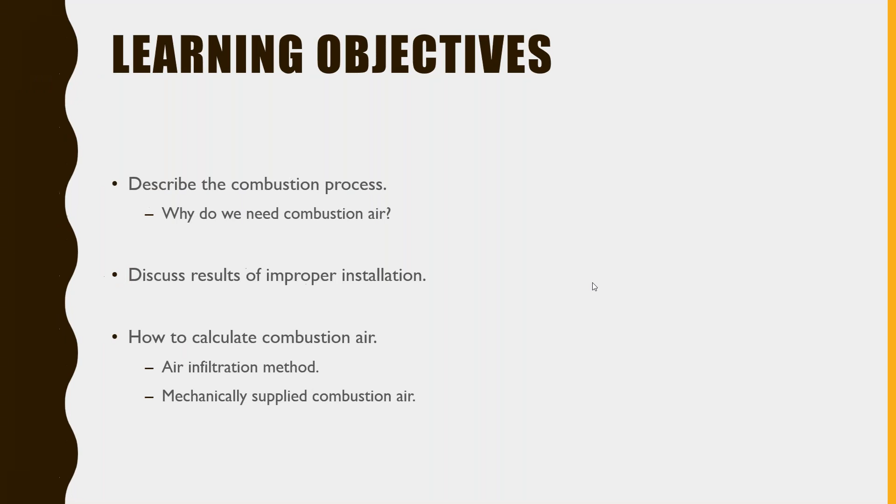Here's our learning objectives. We're going to describe the combustion process and why we need combustion air. We're also going to talk about what happens if we install equipment improperly without considering combustion air. Then we're going to talk about 2 methods to calculate combustion air: the air infiltration method, and how to mechanically supply combustion air.

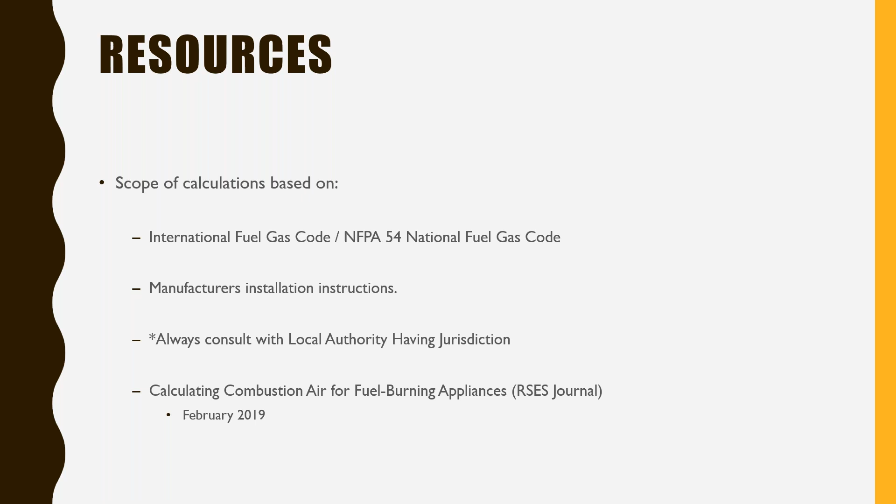This presentation is based largely on the International Fuel Gas Code. It's a code reference and standard that is adopted in many states in the U.S. and Canada. It's co-sponsored with the National Fire Protection Association's NFPA 54, which is the same book, just co-sponsored. So the bulk of our calculations are based on those code references. Also, some takeaways are actually in manufacturer's installation instructions. We have to put out the blanket statement that you always want to consult your local authority having jurisdiction, as they may have stricter requirements for your particular neck of the woods. If you're looking for more information, we did write an RSES article back in February 2019 with the same title, and I believe you have access to that as an archive.

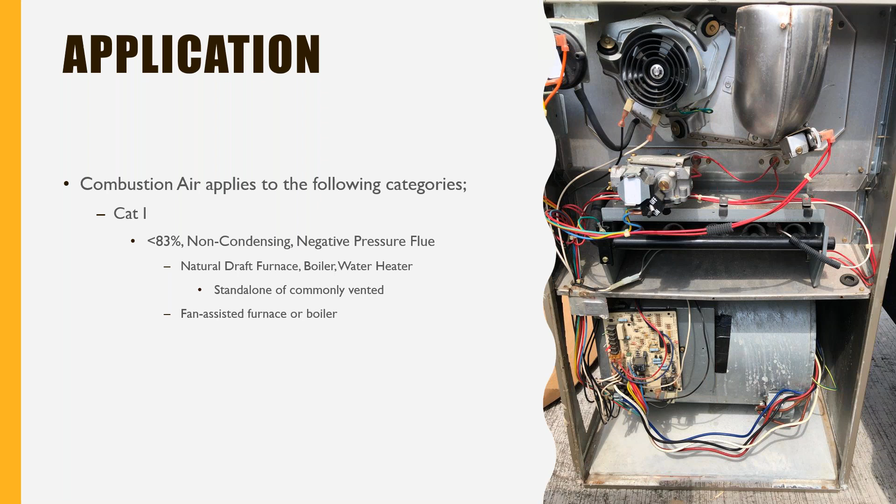As we get going, we need to talk about our application - when we're talking about combustion air, what scenario or equipment will we be applying it to? For starters, we'll talk about the different categories. For category 1, we're looking at something that's going to have an efficiency of 83% or below. It's not going to condense, and it will have a negative flue pressure. Generally these pieces of equipment are induced draft furnaces and boilers, or natural draft, and they can be standalone or commonly vented.

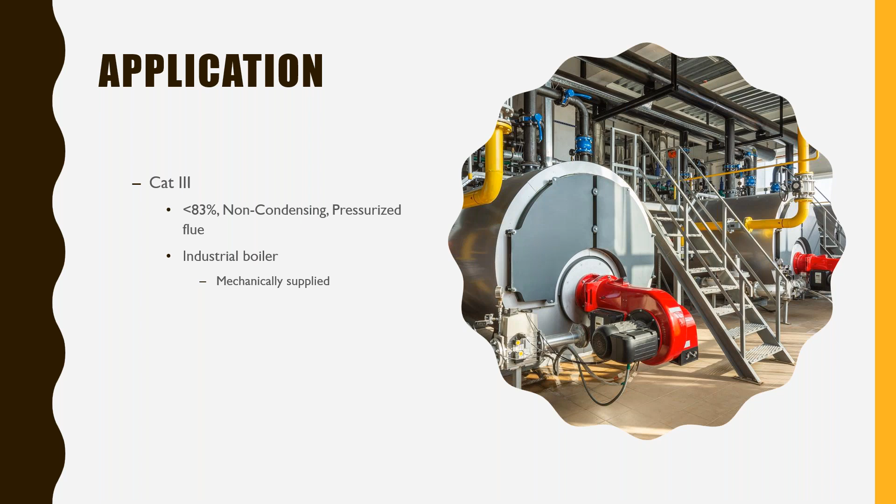Additionally, when we talk about combustion air, we talk about category 3 appliances. These are larger industrial boilers, typically 83% or below. They have a non-condensing exhaust flue piping, but the flue is actually pressurized. This will be primarily large industrial boilers you may see in a hospital or a large facility. So that's category 3.

And then category 4 - you may be thinking, well, wait, category 4 shouldn't apply to this. It can. Category 4 is above 87%, it's condensing, and the flue pipe is pressurized. However, it only becomes a consideration if the installing contractor was to use a single pipe, where they'll get combustion air from the space and just use another pipe for the exhaust gases.

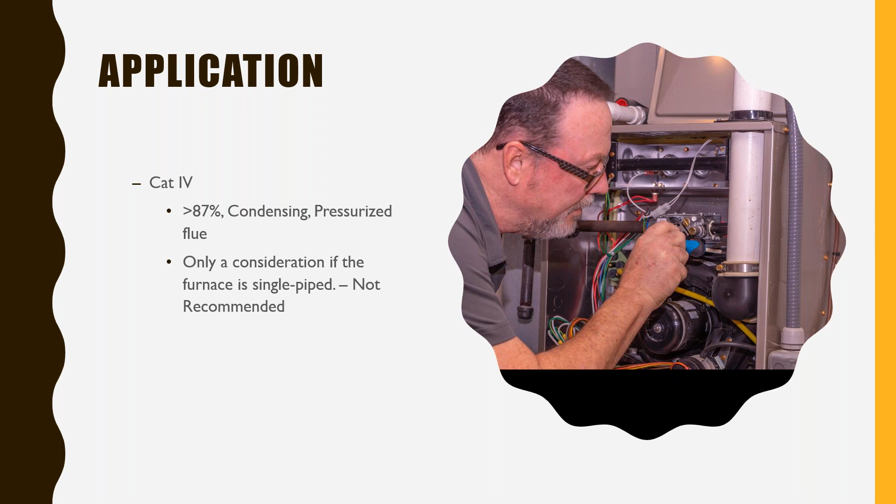This arrangement is not recommended because if you do, you have to account for combustion air, which we'll talk about here in a minute. All right, so let's do a quick review.

What do we need for combustion? We need air, we need fuel, and we need a source of ignition. Put those together, we get a fire.

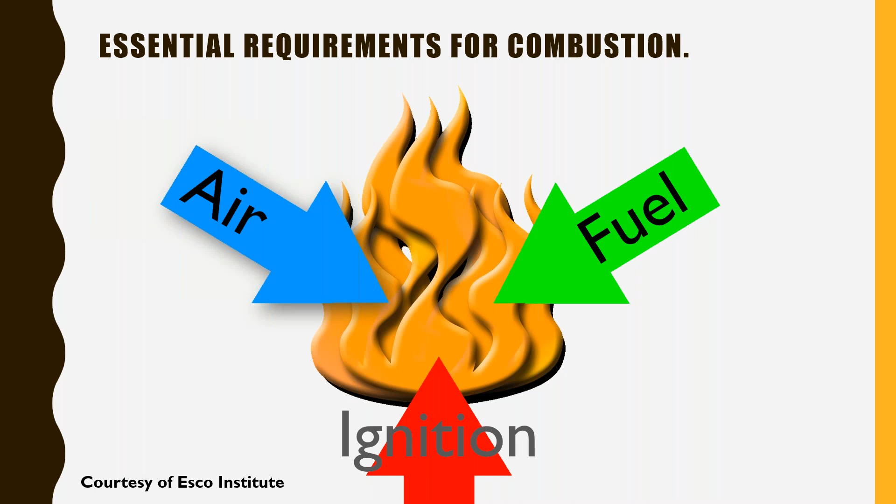Now, when we're talking about air, we're actually specifically looking at the oxygen content that is inside the air. Roughly around 21% of the air in the atmosphere is oxygen. So when we say air, we really mean oxygen. We can't get the oxygen to the burner without air. So when we say air, we're actually referring to the oxygen for combustion.

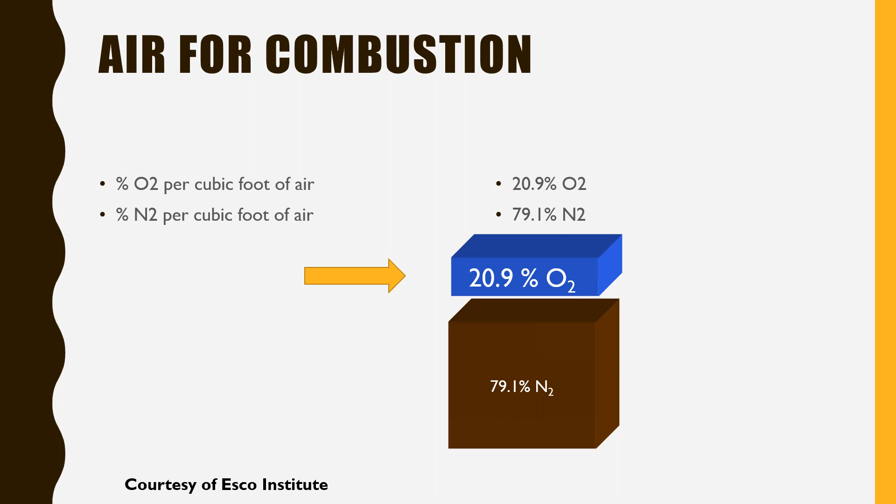Now, I'm going to be referring to a term, and I want to get it established as we move on in our presentation. That term is called a combustion appliance zone. We're going to use that to describe a space - where do my appliances actually live? It's a physical location. Other people may refer to it as a furnace room or mechanical room, but we're going to call it a combustion appliance zone.

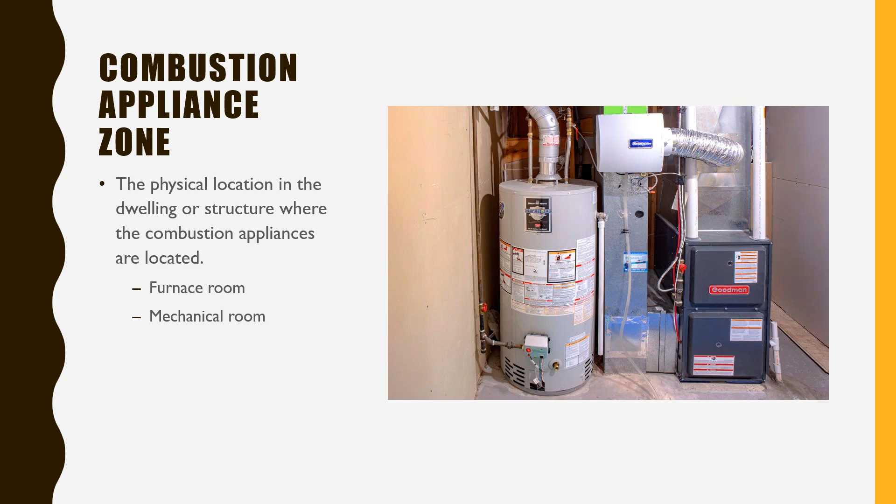When we install equipment, we need to have the design goal in mind that we want to get complete combustion. In order to do that, we have to ensure that that appliance, whichever application range we're dealing with, either has enough space, enough volume for complete combustion, or we're going to supply it through a mechanical means. Complete combustion is also going to help us keep that equipment running at peak operating condition and also help us to prevent carbon monoxide generation.

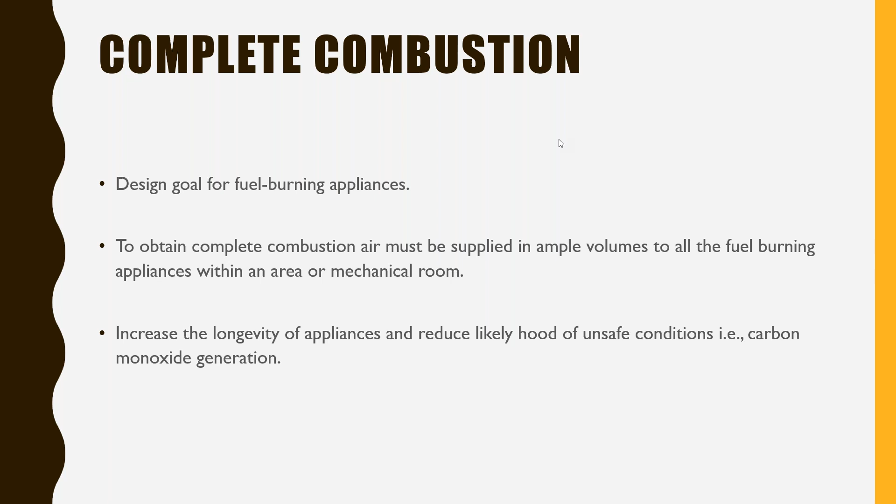So what happens if you don't have enough combustion air? First things first, you get incomplete combustion, which can cause carbon monoxide generation. And we know carbon monoxide is bad, but it is also extremely wasteful. Carbon monoxide still has heating value in it. And when you purchase units of gas from your utility supplier, you purchase those units of gas or fuel. And if you don't get the energy out of it, you still paid for it and you didn't get your money's worth.

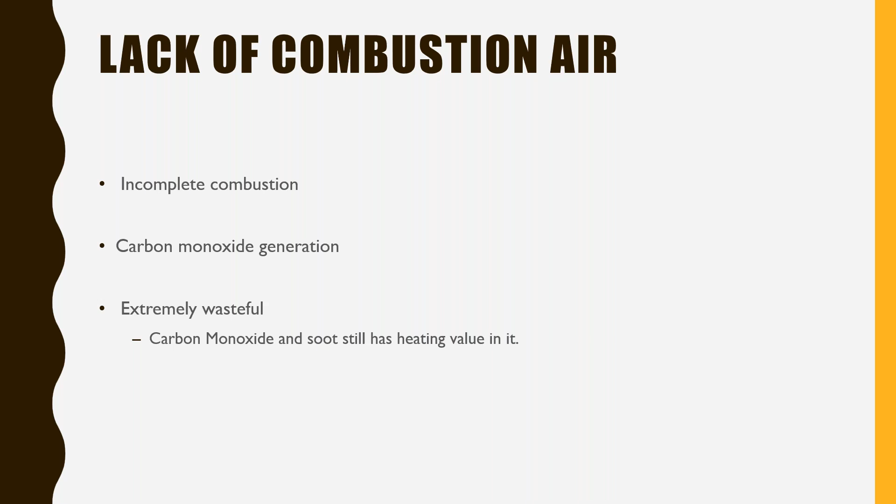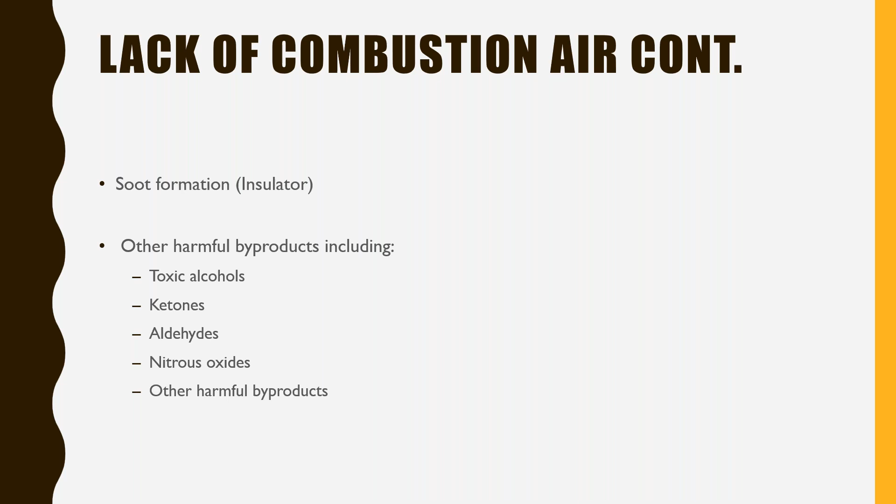So when we don't burn our fuel completely, we leave a little money on the table, if you will. We can get soot formation, which acts as an insulator, which is also wasteful. It can damage our equipment. And then there's other harmful byproducts, which includes toxic alcohols, ketones, aldehydes, NOx, and other harmful byproducts. Some of these are pollutants, and some of them are indoor air quality problems that can affect humans. So not burning our gases completely has some other side effects outside of it being carbon monoxide and wasteful.

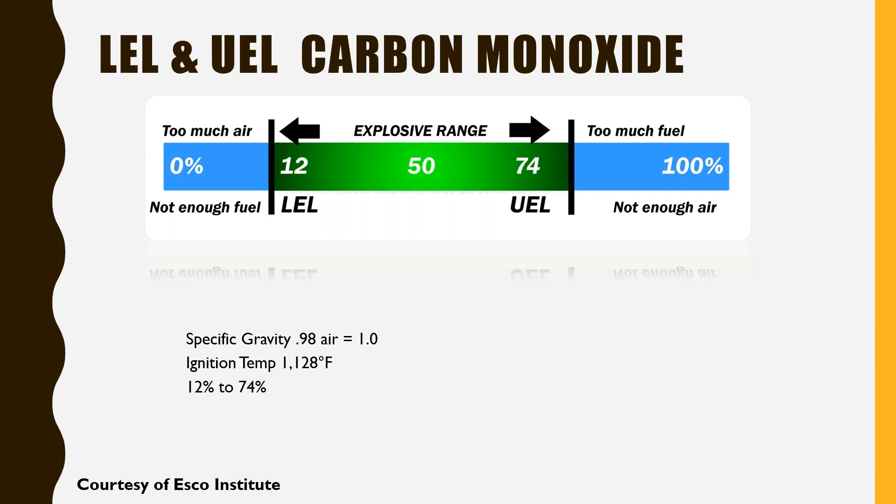Showing you that carbon monoxide is wasteful, right here what we're looking at are the limits of flammability. If you look at the explosive range, this goes to show you that carbon monoxide has heating value in it, and I can actually get it to combust. So again, I paid for that fuel from that utility supplier, but I did not get my money's worth. Now we're going to look at scenarios, how proper air being supplied is going to support clean combustion.

In a perfect world, which we're not in, I have CH4, the chemical nomenclature for natural gas, and then I have oxygen, roughly 2 parts, and nitrogen. When I put these into a combustion process, I get a flame, and then I get my products of combustion. In a perfect world, I get harmless carbon dioxide and harmless water vapor, and as you see, the nitrogen didn't participate.

That's perfect combustion. In this process, there's no waste. All the proper chemical elements mixed appropriately. I have no waste: carbon dioxide, water vapor, and nitrogen didn't participate.

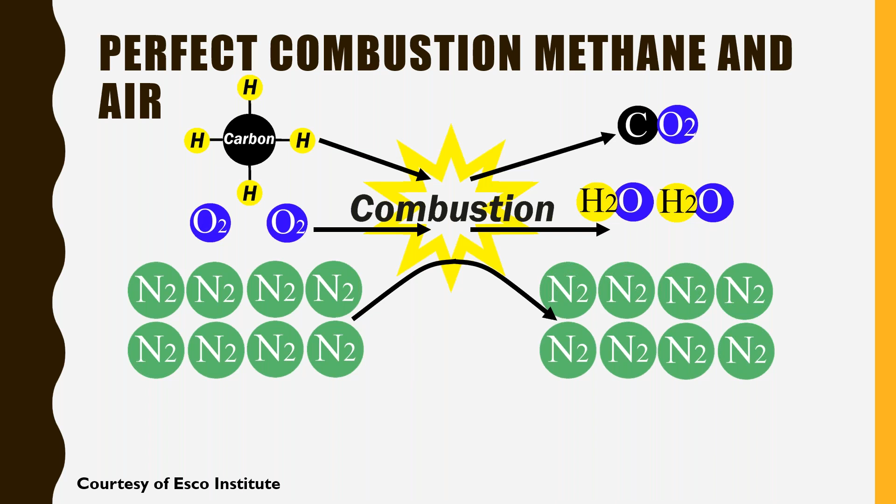Here's what we're striving for in our business: complete combustion. We can't control our burners perfectly in a dynamic environment, whether a home or a business, so we always have to supply excess air. That excess air is combustion air we're giving to ensure the appliance has enough air for combustion. So I still have my chemical molecule, I still have my air sample, but a little bit additional just for some insurance. I put those into the combustion process.

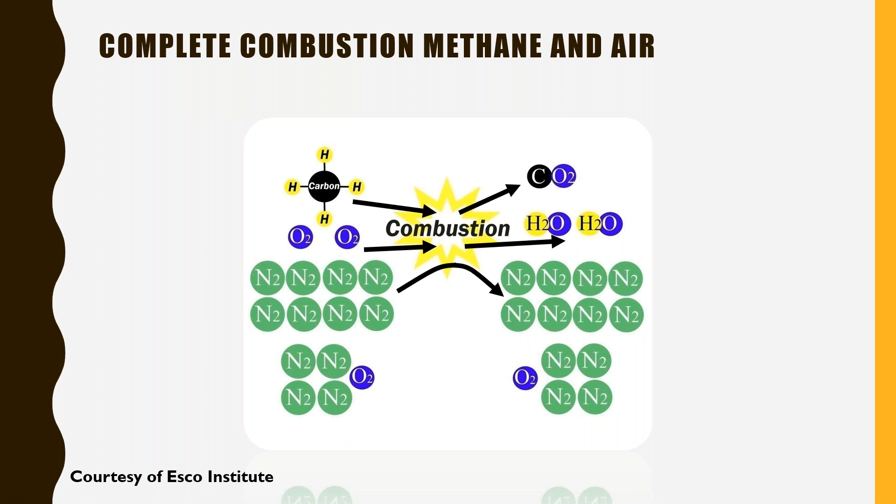The fuel burns, and these are my products of combustion. I still have carbon dioxide, I have H2O, water vapor, and as you see, my nitrogen didn't participate, and not all of my excess air participated. It was insurance. We supply combustion air to get complete combustion.

So that's the first thing that can happen, that appliance starts to burn badly, starts to get poor combustion. Also, I can not supply enough combustion air, and I can affect the pressures that appliance needs to have a positive draft going up the chimney.

So we're going to introduce a new term called spillage. Spillage is exhaust gases coming back. They're trying to go up the vent system, they can't, either a chimney problem or in this case, lack of combustion air. They come back. Now this sets up an extremely dangerous situation where the exhaust gases possibly have high content of carbon monoxide, and now I'm giving them a path back into the building.

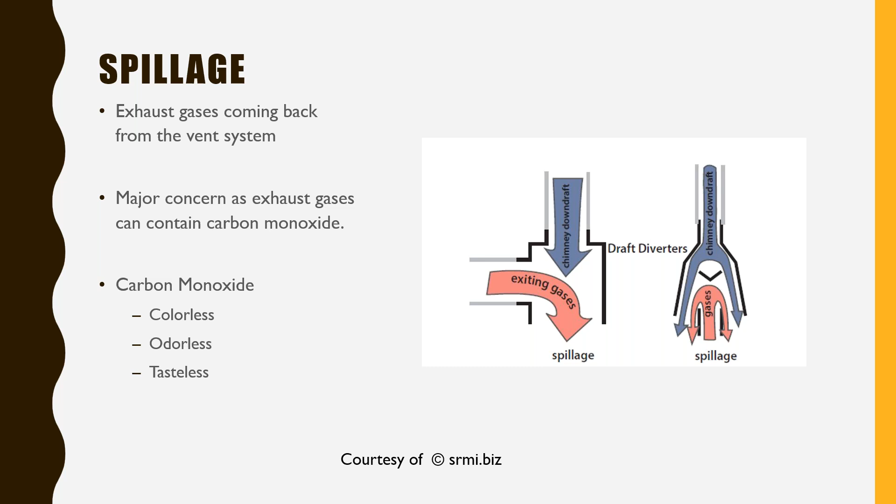So combustion air is an absolute necessity. And as we just highlighted, carbon monoxide is colorless, odorless, and tasteless. In an extreme case of spillage or backdrafting, I can actually physically get the flames inside that piece of equipment to come out. We call it conditioned flame rollout. A serious fire hazard can be caused by a blocked chimney, depressurized combustion zone, or lack of combustion air.

So we have other consequences outside of just bad combustion.

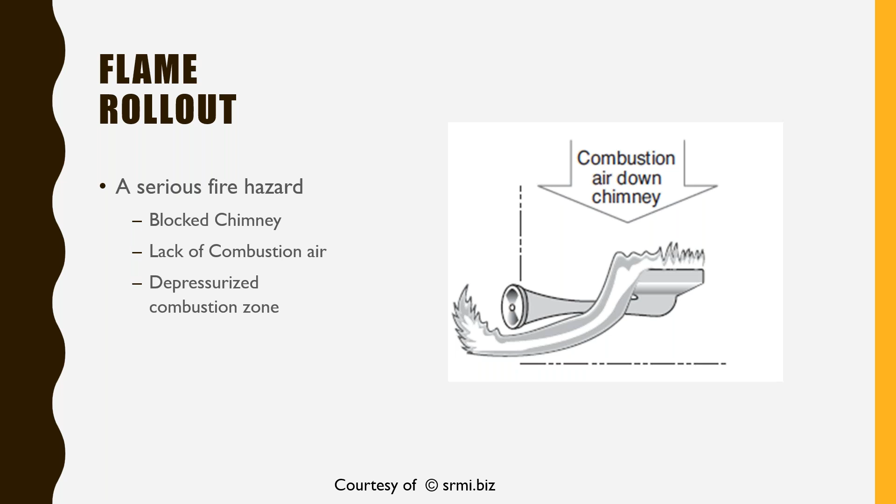And that brings us to our first poll question. Sean? All right, so the first poll question: what is combustion air? A, makeup air. B, air necessary for the complete combustion of a fuel, including theoretical air and excess air. C, ventilation air. Or D, a byproduct of complete combustion.

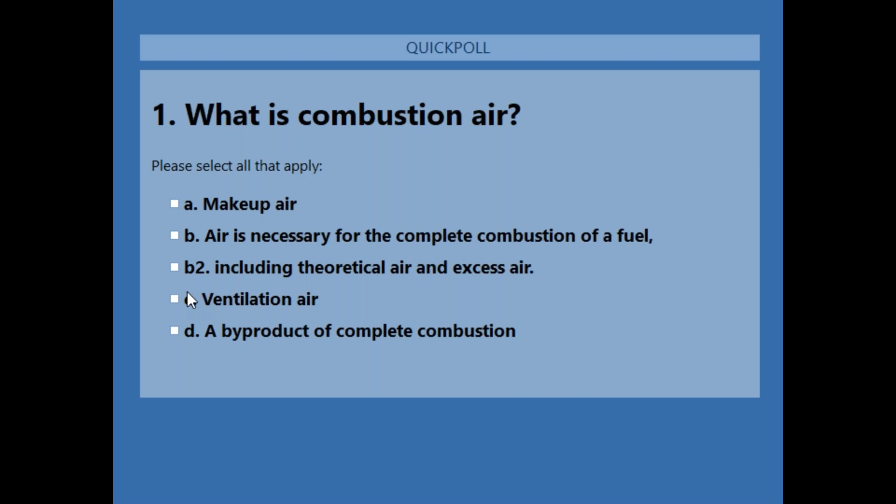So the poll question was, what is combustion air? The answer was B, air necessary for the complete combustion of a fuel, including theoretical air and excess air. Pretty much the majority chose B. 8% chose answer A, makeup air, and 5% chose C, ventilation air, and 0% chose option D. And now back to you, Brett.

All right, thank you, Sean. We'll discuss why those are often confused, makeup and ventilation air.

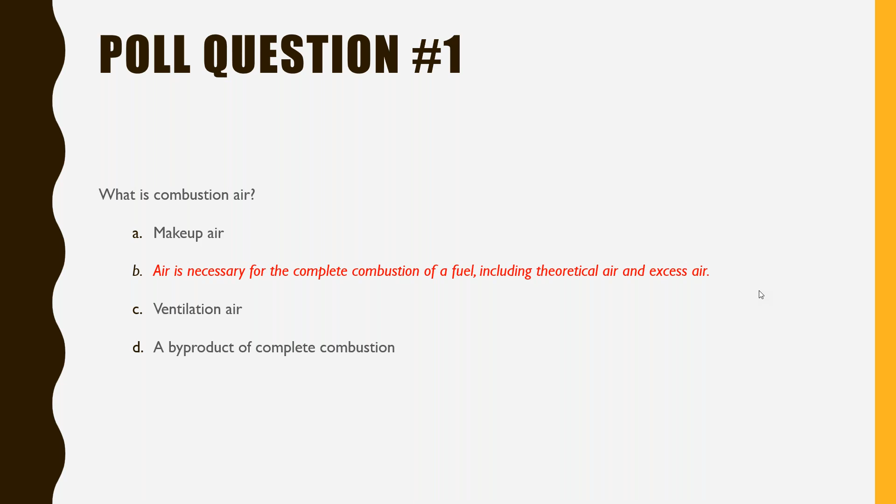All right, so next, code compliance. When we talk about combustion air, it's really not an option, it's really a code compliant thing that you must ensure is done on every piece of equipment. You must account for it. And any combustion appliance, whether fuel oil, propane, whatever appliance you're using, if it burns, you have to provide combustion air.

So what happens is it's often overlooked by the contractor. Maybe they didn't have adequate training and didn't commission the appliance properly. Sometimes it's the customer - one example is a homeowner remodels a basement or mechanical room and inadvertently seals off that room, cutting off the source of combustion air. So it can be overlooked by both the contractor and the homeowner.

When you have a combustion appliance that hasn't been set up properly and you have an issue, that can void the manufacturer's warranty. Most manufacturers have specific guidelines they like to see for combustion.

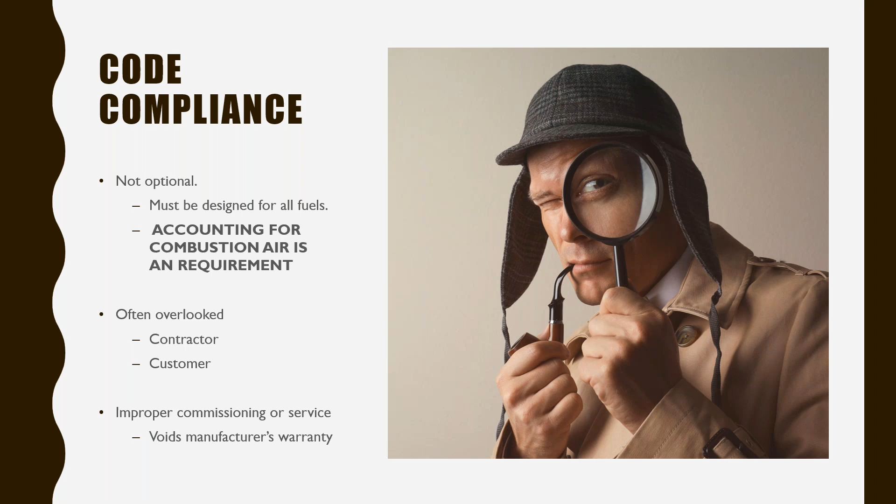Remember, this is coming from the International Fuel Gas Code. So the methods are prescriptive, meaning there are solutions we can implement to get combustion air. For the sake of time, we're going to focus on a couple: one is indoor combustion air, and the other is outdoor. Remember, these are both coming from the International Fuel Gas Code.

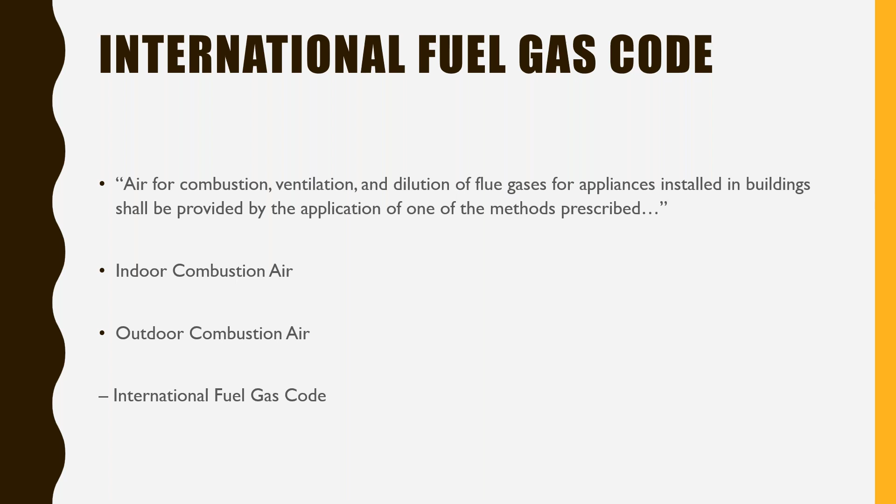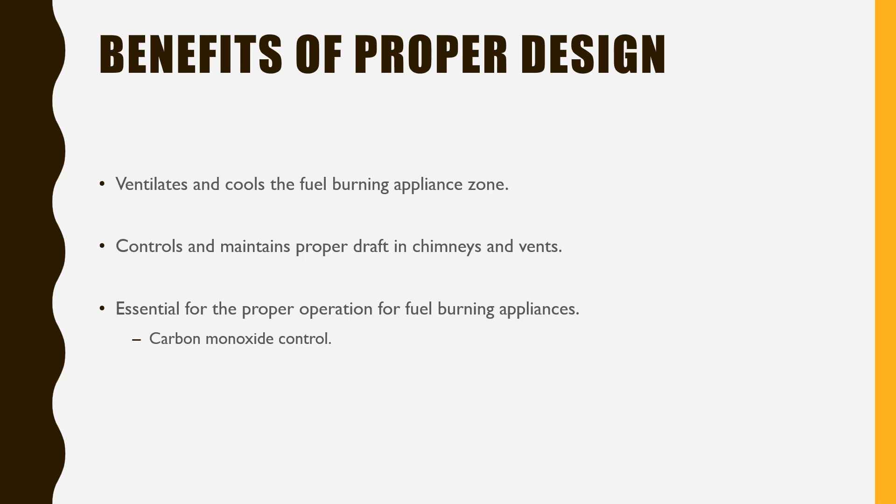Benefits of proper design: when I have adequate combustion air, I can ventilate and cool the combustion appliance zone, and I'm going to maintain a proper draft inside my stacks or chimneys. Having proper combustion is going to mitigate that carbon monoxide generation.

Now, reason why we're bringing this up even more so now is that there's an industry trend where new homes are being built really, really tight from an air infiltration point of view. What we mean by air infiltration - they're being built where the house can't breathe. Many of us have heard that term before. Or there's a trend for weatherization to occur, which is basically taking an older house and making it tighter so we can reduce utility bills. In either case, we have to identify the need for combustion air.

Now, ventilation is often confused with combustion air. When we talk about ventilation, it's specifically for diluting harmful products inside your house - maybe your cleaning equipment, cleaning chemicals, or an unvented oven or range. You're trying to reduce the concentration of things inside that home or building. So ventilation is more so for people - it's more for respiratory health.

Some people also call it makeup air, but makeup air can also be used to relieve pressures - that is not combustion air. Combustion air is a separate term for air specifically for appliances, and it shouldn't be confused with ventilation and makeup air. Like we talked about before, it's often overlooked, but it is a separate design consideration. So as an installing contractor or technician, you have to know how much air to supply and how to supply the proper amounts of combustion air, and we're going to talk about that.

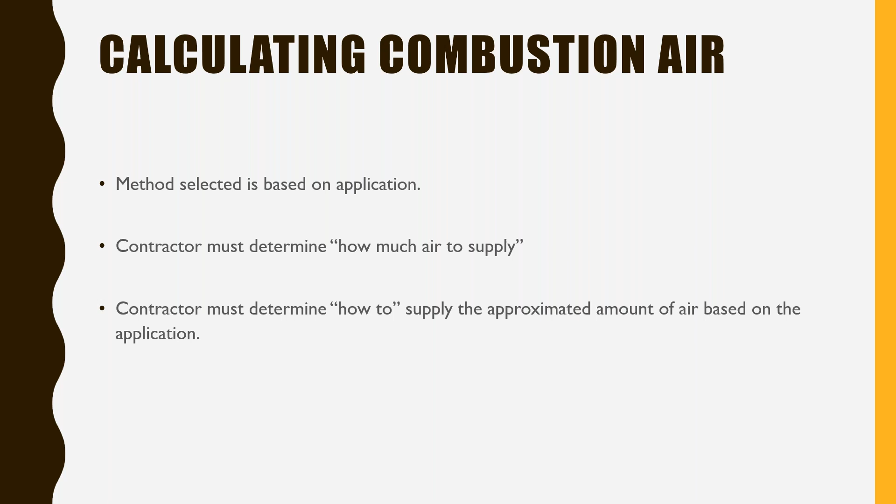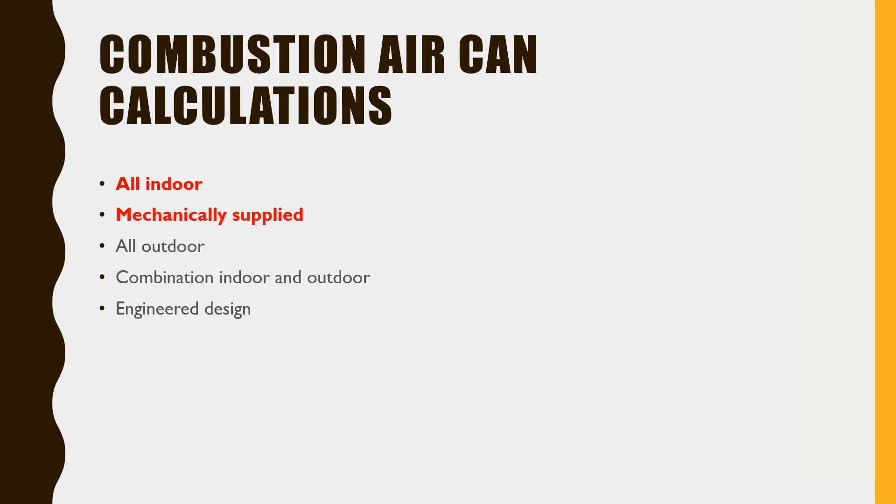In the International Fuel Gas Code, there are 5 different prescriptive ways for you to achieve appropriate amounts of combustion air. However, we're just going to cover 2 of the most commonly used ones.

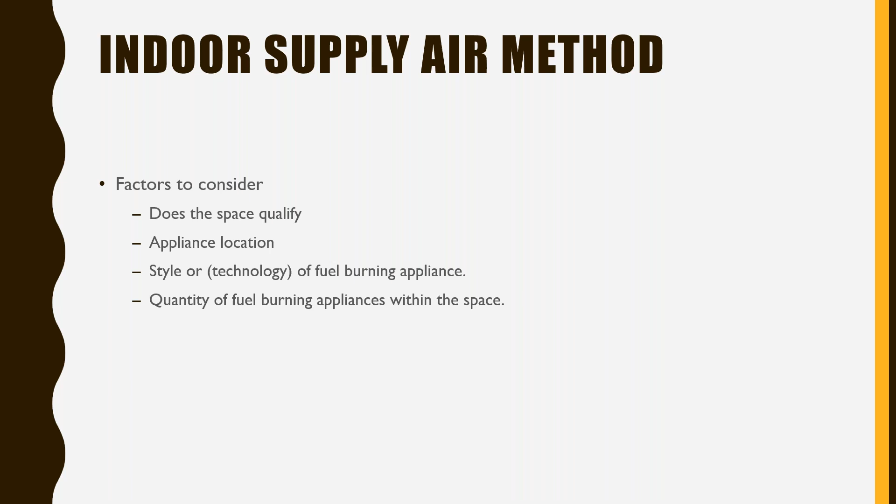So when we go with the indoor supply air method, we're utilizing the volume of the CAZ, or combustion appliance zone. We're using where that piece of equipment physically lives, using that volume of space for combustion air. One advantage is it's cost effective and easy to apply.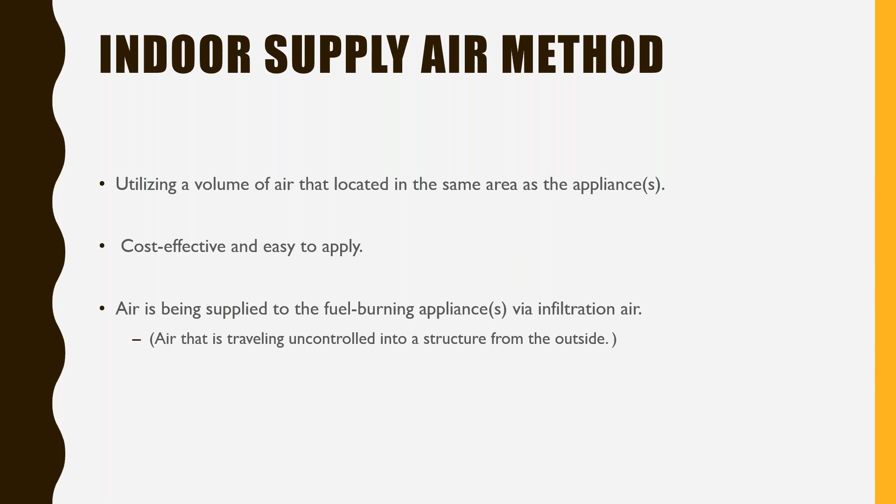However, the disadvantage is that I'm relying on natural infiltration air to supply my combustion zone. Infiltration air is air traveling uncontrolled into a structure from outside, so I don't have any control over that. I'm relying on that building being leaky enough to supply combustion air, and we've discussed that buildings are being made tighter, or weatherized.

So with that being said, we have to determine how much of that building shell is leaking in order to see if it qualifies to be used in the space. For indoor combustion to be practical, we must have a minimum of 0.4 air changes per hour.

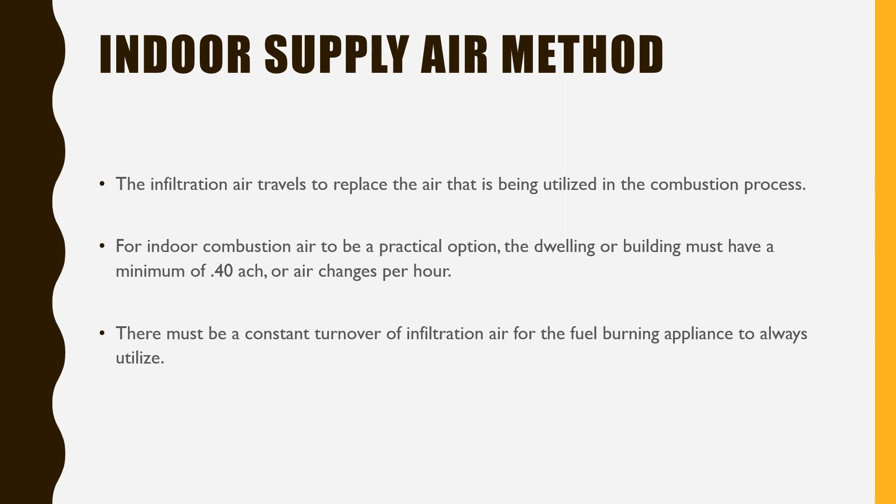So 1 air change per hour is when I turn over every cubic foot of air inside that home or building one complete time in an hour. So 0.4 air changes, basically 40% of that 1, I have to turn over airflow from outside to inside that building for it to be deemed leaky enough for me to implement the indoor supply air method for combustion air. So to rely on this method, there must always be a constant turnover of infiltration air for the fuel burning appliance to always utilize it.

So first question: does this building qualify? Is it leaky enough? There are two ways you can go about looking at that - you've got to test the building. The test methods are either a blower door test, which we'll describe, or engineering charts. Either one of these methods will give you the background on whether the building is leaky enough.

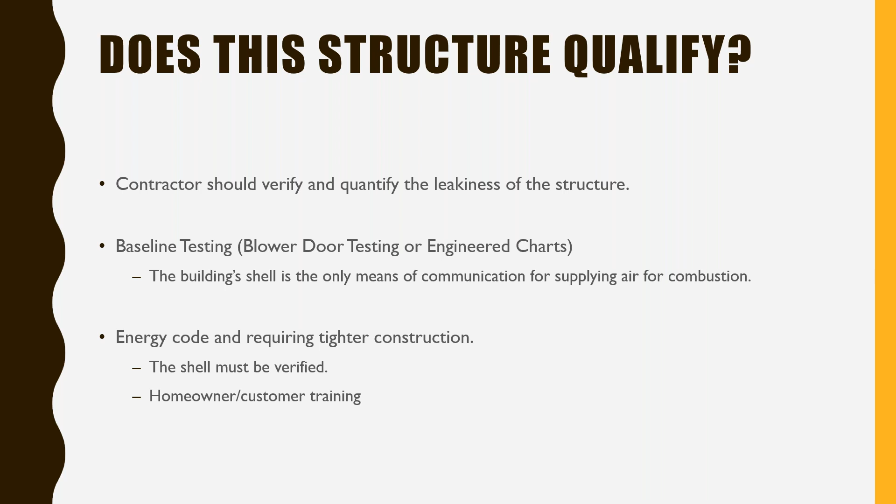And then once we determine that and do our job, we always have to do some homeowner training to ensure that they didn't inadvertently put our equipment into a confined space. We'll discuss that shortly also.

So what a lot of people elect to do is use a blower door test. A blower door is a sealed shroud containing a fan, and we put that on an exterior opening, typically a door for a building. That fan, depending on how the blower door is set up, can either pressurize or depressurize my space. What we're trying to do is simulate a 15 to 20 mile per hour wind approaching all sides of the structure at once.

With this tool, this blower door, I can quantify my air leakage, and we'll use it to verify the tightness of the structure. If you get into building science mode, I can run a blower door using a thermal imaging camera, and I can actually find the leaks inside of a structure, which could be helpful.

When we run a blower door test, there is a test reference number called CFM50. This is the airflow, cubic feet per minute, that the building is leaking at 50 pascals, or at the pressure difference influenced by the fan. So we use CFM50 in building science to make this test repeatable every single time - it's a reference test pressure.

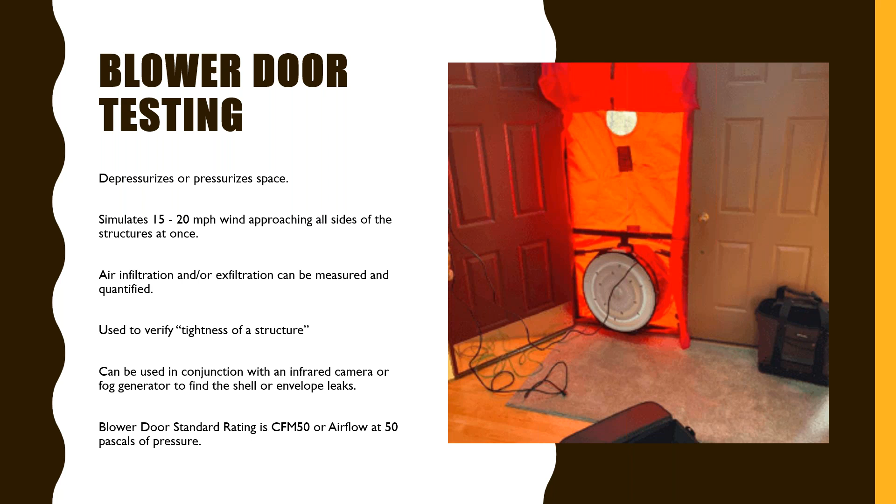All right, so we got to do some math. We'll do that shortly. A dwelling or building must have a minimum of 0.4 air changes per hour, and that's a natural measurement.

The blower door provides us with CFM50 - the fan created a 50 pascal pressure difference. So we got two different readings that we have to handle. We have to derive the natural airflow from the exaggerated airflow caused by the blower door.

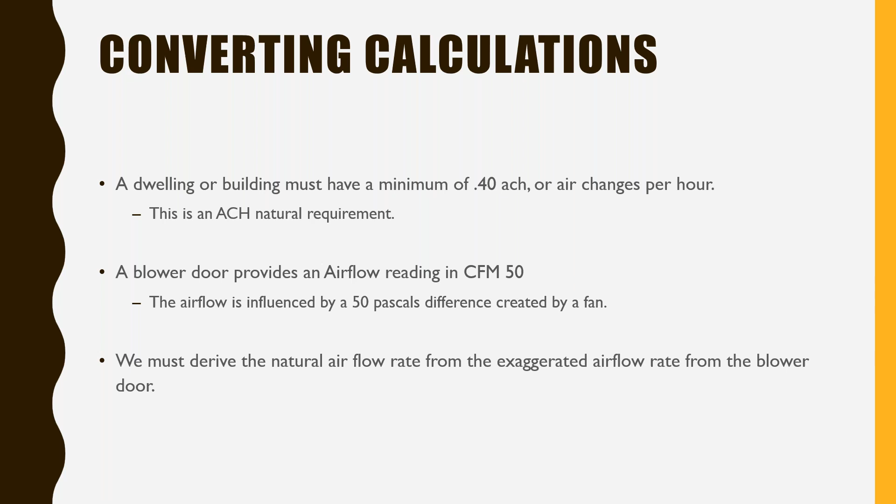How we do that is with these formulas. The first formula, ACH50, is air changes per hour at 50 pascals. So when I have CFM50 given to me by a blower door - cubic feet per minute - I have to make that calculation become an hour.

So I multiply that by 60 minutes. And then in order to get the air changes of that structure, I have to divide that total by the building volume. So I can get a CFM50 number for my blower door, and then I can get ACH50 if I do the math.

Once I get ACH50, I simply divide that by 20, and that gives me ACH natural - that's the number we're looking for. And remember, when we talk about volume, that's the length times the width times the height of a room in cubic feet.

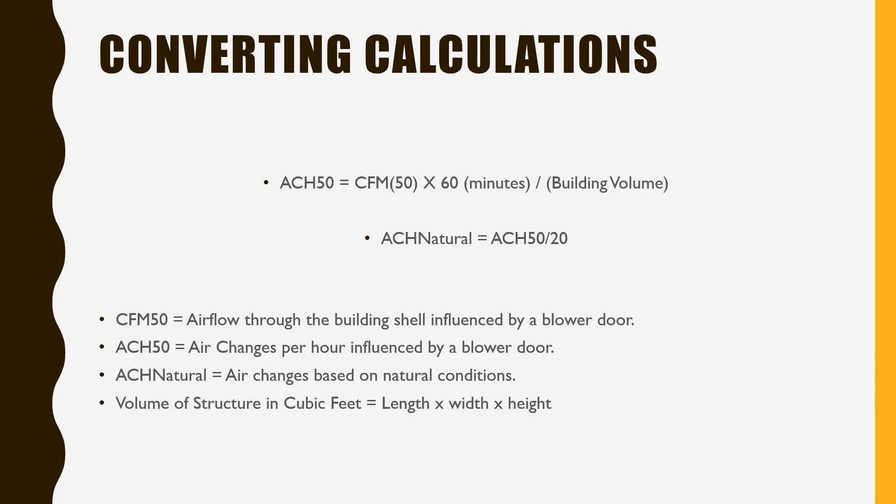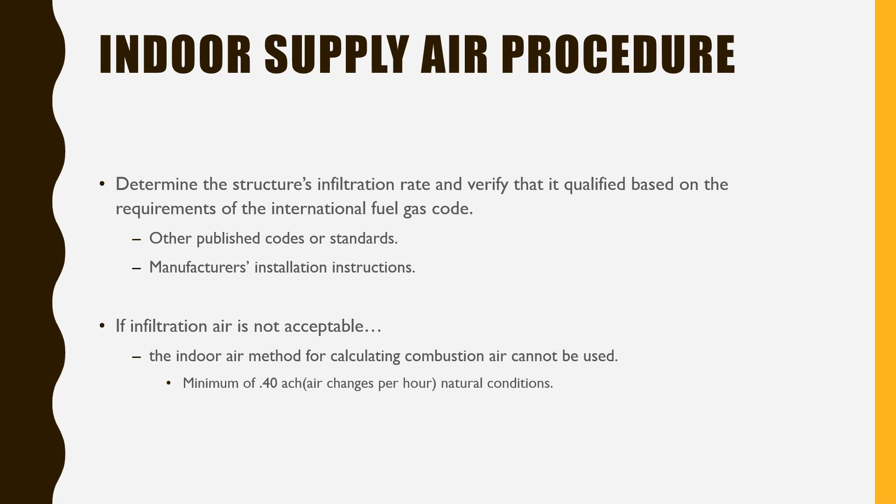So when we talk about the indoor supplied air procedure, first thing we have to do is verify that structure did qualify - it was leaky enough in order for us to use this method. If it is not leaky enough, I can't use this method for combustion air, I have to use something else. Minimum, it has to be 0.4 air changes per hour.

So if it is appropriate, if it is leaky enough, then I simply start by collecting the BTU input ratings on all my pieces of equipment that live in that combustion zone, that combustion appliance zone.

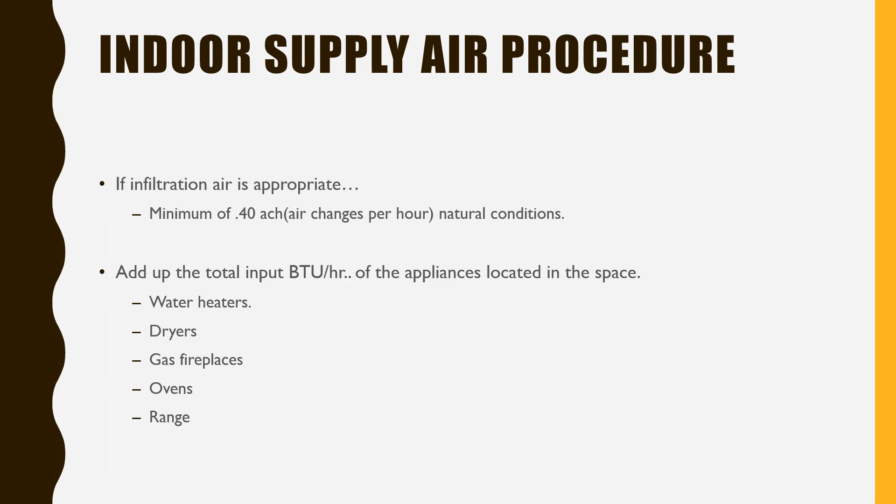And that could be water heaters, dryers, gas fireplaces, ovens, ranges, furnace, boiler, whatever is in that appliance zone, combustion appliance zone - we record the input data plates because we have to supply combustion there for that appliance zone, like so.

Here I have a water heater and the furnace in the combustion appliance zone, and let's say this 90% furnace was single piped - the installer just stubbed it up above the picture. These two appliances have to be accounted for, so I will add the BTU total up.

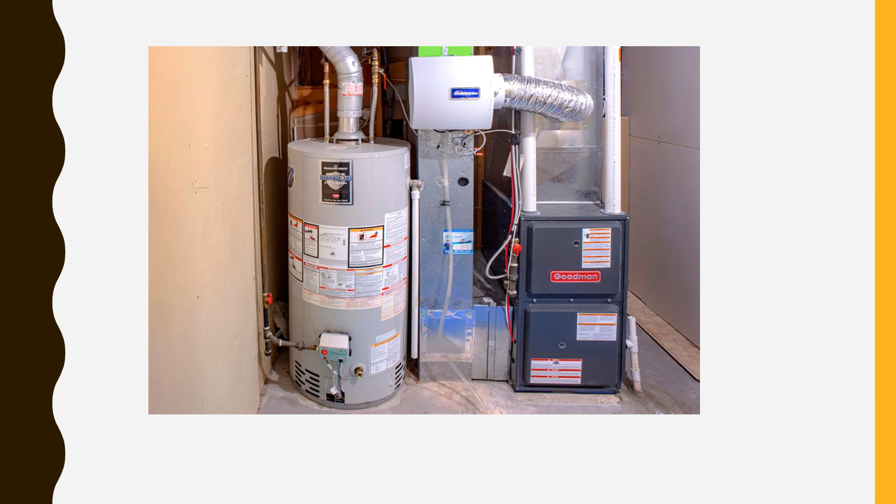And then once I add my BTU total up, I will go into my next step. Once I get my total, I have to understand what a confined space is - that's another definition we're going to throw in. A confined space, the volume of the space must equal 50 cubic feet per 1,000 BTUs per hour.

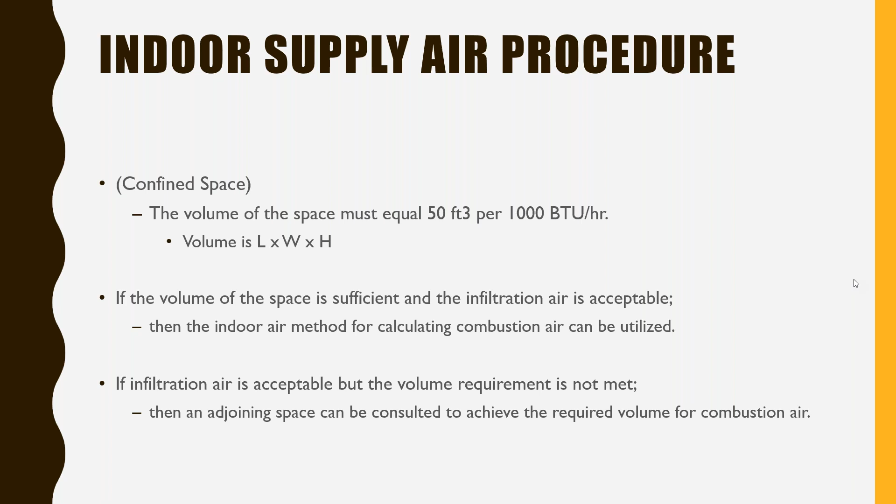And once again, volume is length times width times height. Here's how you proceed: if the volume of the space is sufficient and the infiltration is acceptable, then you can use the indoor air supply method. If the infiltration is acceptable - you are leaky enough - but the volume is not met, then I have to possibly communicate that combustion appliance zone with another area and add their volumes together, like so.

So let's work through a problem here. In this picture, I got a furnace at 100,000 BTUs per hour. I got a water heater at 40,000 BTUs per hour. So my total for both appliances is 140,000 BTUs per hour.

Remember, we need 50 cubic feet of air per 1,000 BTUs per hour. So when I do the math, I take 140,000 divided by 1,000 gives me 140. I multiply 50 by 140, that gives me 7,000 cubic feet. So we need a space of roughly 7,000 cubic feet for combustion air for these two appliances.

That's roughly a room that's 27 by 27 by 10. Now, I don't know about you, but that's a pretty big room. Some houses may not even have a footprint that large for one room, so we might have to get that from a combination of rooms. Here's how we do it.

Let's say this mechanical room is pretty small, and I don't have the 7,000 cubic feet of volume I need to have these appliances operate exclusively in that combustion appliance zone.

So what I have to do is connect it to another room utilizing what's called transfer grills. How it works: I'm taking the volume of the room where the combustion appliances live, and I'm adding the volume of an adjacent room. I'm creating an opening, maybe through the wall surface or door surface, and putting transfer grills to allow the rooms to be connected so that I have a cumulative total volume that is acceptable for combustion air.

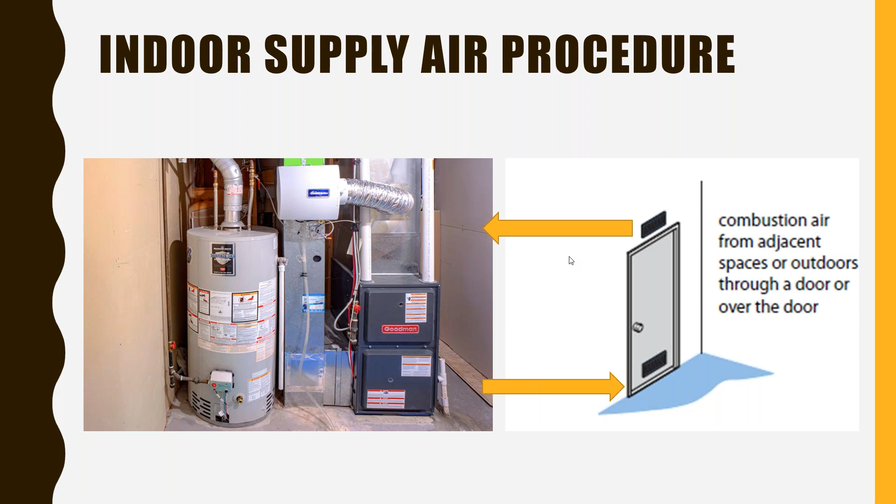So when we size our grills, we need to size them at 1 square inch per 1,000 BTUs per hour. Now remember, a grill is not 100% open - you have metal or wood in the way, so we have to know the free area of that particular grill. Once you come up with your calculations, bear in mind we have to account for the free area for that louver grill. When we make our openings, one needs to be 12 inches from the top, one needs to be 12 inches from the bottom, and this is going to promote that convective air current between the two spaces.

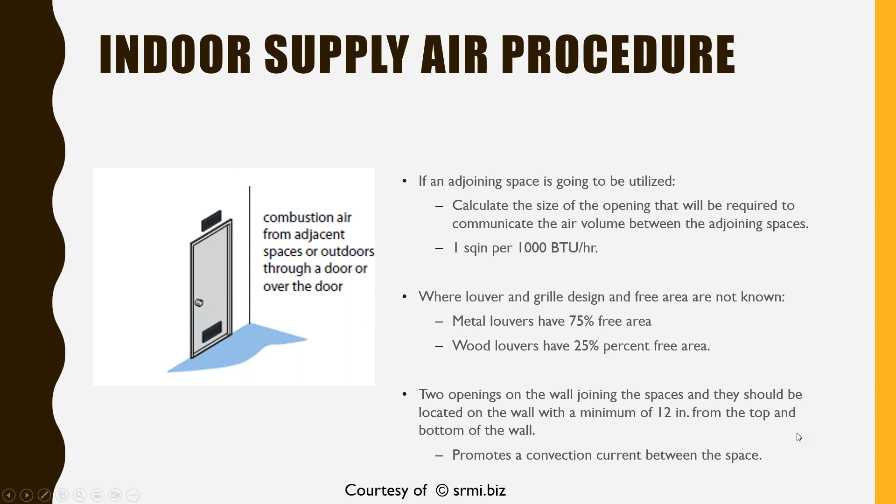All right, so let's look at an example. This space right here is 10 by 10 by 8, and this gives me 800 cubic feet.

The space adjacent to it is a lot larger - it's 100 by 100 by 8, and this gives me 80,000 cubic feet. So total volume of both spaces is 80,800 cubic feet. We've already qualified this house - it is above 0.4 air changes per hour, so this space is acceptable.

So the equipment we have in space 1 right here: we have 150,000 BTUs per hour with a furnace, we got a water heater at 40,000 BTUs per hour, we have a dryer at 40,000 BTUs per hour, which gives us a combined total of 230,000 BTUs per hour. Remember our rule, we need 50 cubic feet per 1,000 BTUs per hour.

So with that 50 cubic feet, we're going to multiply that by the quotient of 230,000 BTUs divided by 1,000 BTUs per hour, which works out to be 230. So 50 times 230 gives us 11,500 - this is the volume that we need for these appliances. So as you see, the room they were located in, this first room, wasn't enough volume. However, when we connect it to the second larger room, we well exceeded it, and we already qualified the building. We can use the indoor supply air method for combustion air.

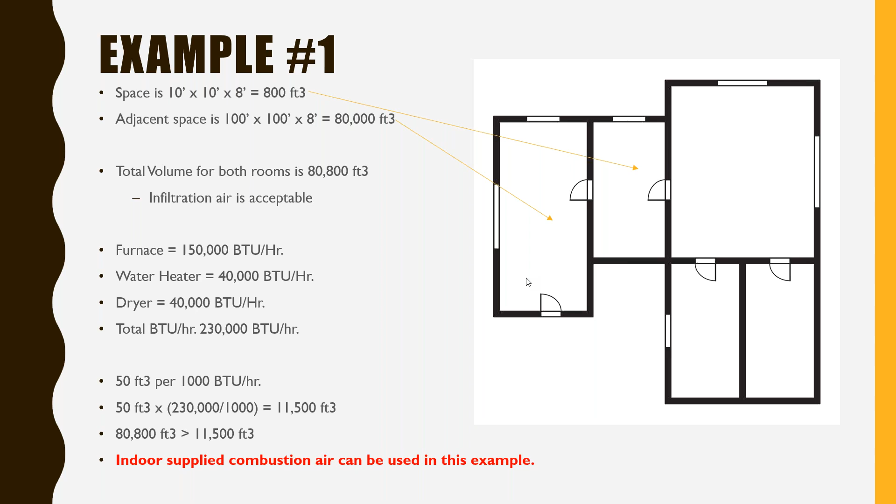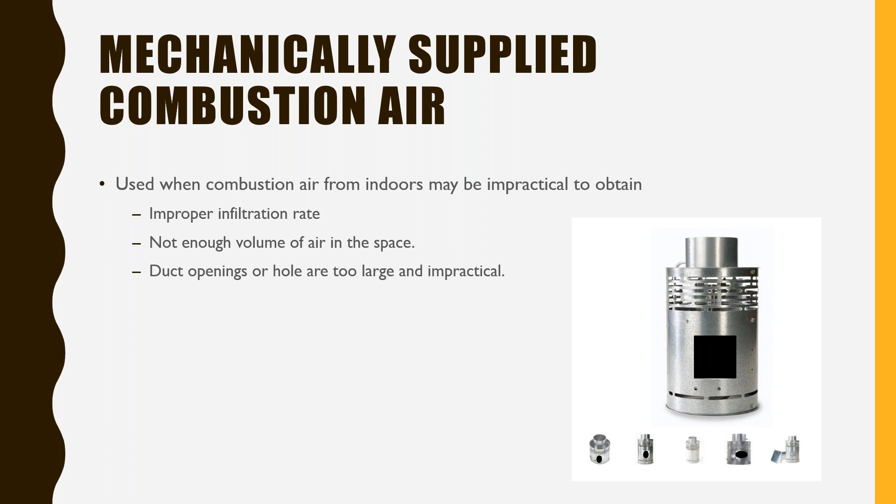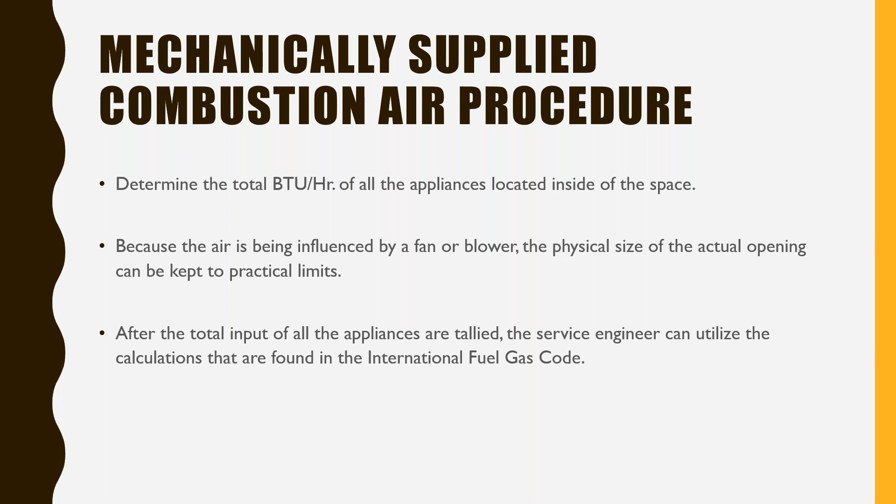So in this situation, we can deploy a fan to deliver our combustion air. The way we approach this is similar - we need to tally up all the BTU input of the appliances inside that combustion zone. Since we're dealing with a fan and mechanical means, the holes or openings to supply combustion air can be kept to practical limits. Once we total up our appliances, we take that information and start to get to work.

With mechanically supplied combustion air, we're basically looking for a fan or blower that can deliver 0.3 to 0.35 CFM per 1,000 BTUs per hour. That's our number, 0.35 CFM.

Disadvantage is higher initial costs. I have to purchase a fan, possibly run an electrical circuit, and do some ducting, so increased material costs and increased labor costs.

Advantages - safe and efficient. You got air supplied directly to the combustion zone, so that homeowner can close off that ugly furnace or boiler room, what they want to do. When I do this, the vents for the combustion appliances are not affected by building pressure because they have a dedicated combustion air fan. And like I said, it's a better protection against inadvertent remodeling.

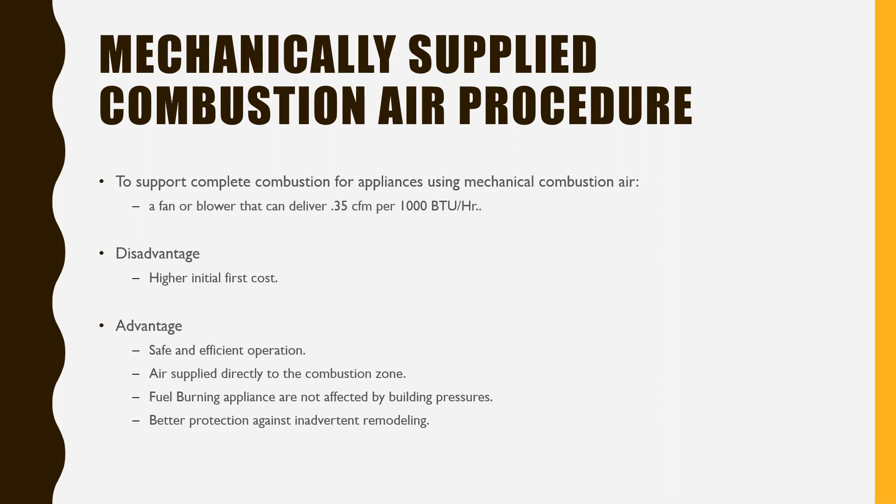So after we calculate our appliances, or tally them up, we get a fan that will be large enough for all the BTU appliances within that space. Now, another provision of the code, if we go the mechanically supplied combustion air fan route, we have to electrically interlock the burner circuit of the appliances with the fan.

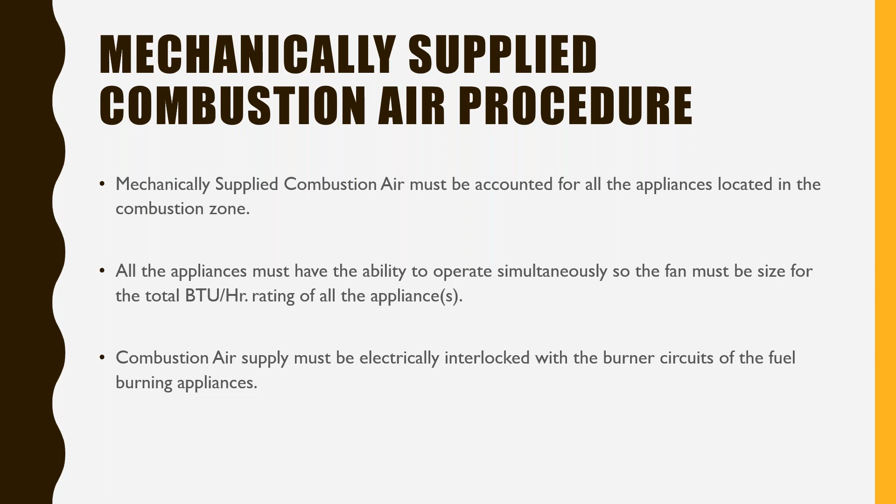So on a call for heat, say with the boiler, once that call for heat comes on, I should have some kind of relay or signal to trigger my combustion air fan to start. That is a code provision because you don't want that fan running, dumping combustion air, when it's not needed.

Usually with the use of a relay or a pressure switch - pressure switches are preferred - that will prove you have your combustion appliances operating and that you need your combustion air fan to come on. So on a call for heat, the fan should start up, and the interlock should shut the equipment down. Once my combustion appliance is satisfied, I should interrupt that combustion air fan and we should be able to shut it down.

Some energy conservation tips - if possible, you should maybe consider heating the combustion air up prior to it being used for combustion air. There's a couple different ways you can do that, but warmer combustion air has the ability to make combustion happen easier and cleaner, so that promotes fuel efficiency.

You don't want to use your combustion fan for any other provisions. It is not acceptable to use double duty with any kind of combustion air fan. It is strictly for the combustion appliances.

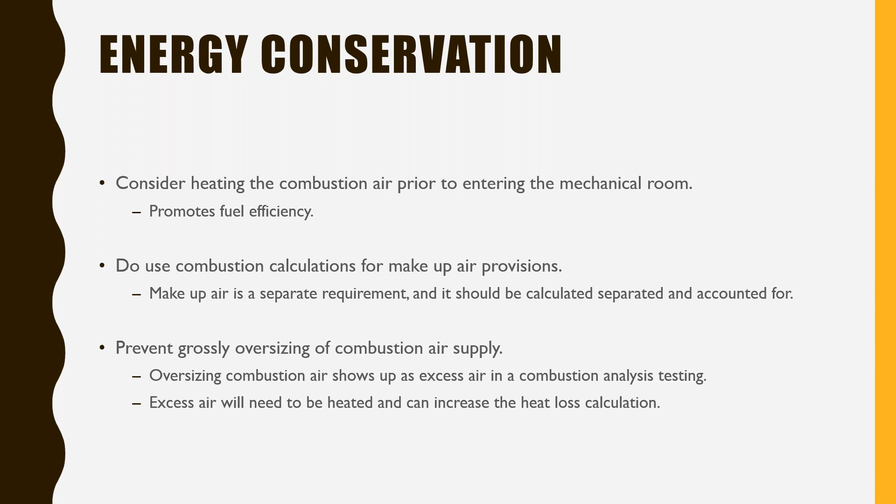Another thing you want to do is avoid grossly oversizing. Fans come in different ranges where you can comfortably supply combustion air. You don't want to oversize the fans unnecessarily because there are consequences - one, wastefulness if you have too much combustion air, so you just want to supply what's needed. That excess air also has to be accounted for in your heat loss, heat gain calculations.

Again, installation errors - you want to avoid grossly oversizing. You just want to meet the requirements. And if you improperly commission this, you get excessive air, carbon monoxide generation, reduced efficiency, and too much combustion air can actually disturb the flame sensing technology with certain boilers. So you don't want to grossly oversize it.

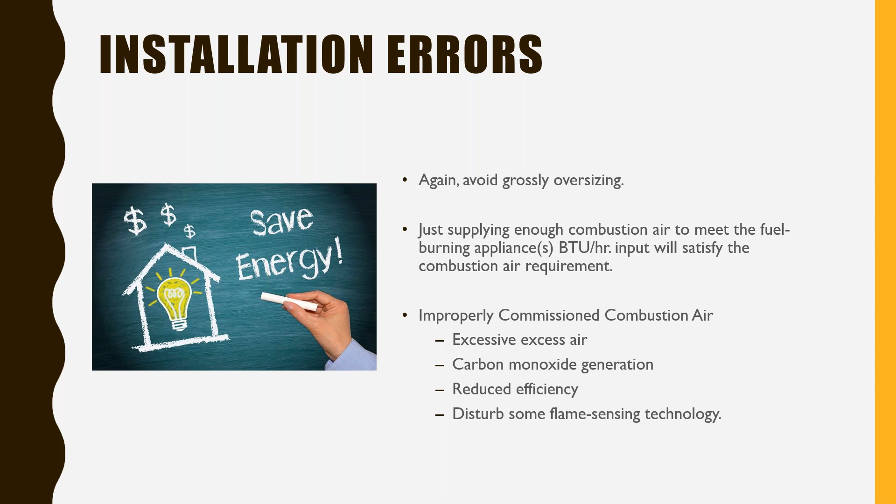So just to recap, you're going to add up the BTUs.

It's going to be difficult to interlock a pilot water heater, a dryer, or a gas fireplace. Those you really can't interlock. However, you still want to account for those inside your BTU calculation.

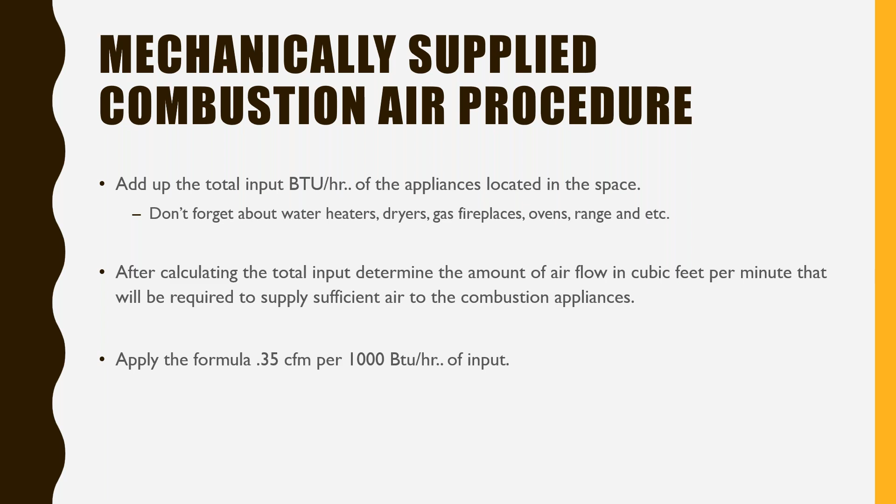After you tally up your BTUs, you're simply going to use your 0.35 multiplier of CFM per 1,000 BTUs per hour, and that is going to help you size that fan. As for maintenance, you always want to periodically check that your combustion appliances are operating properly. We're going to talk more about this in the troubleshooting section.

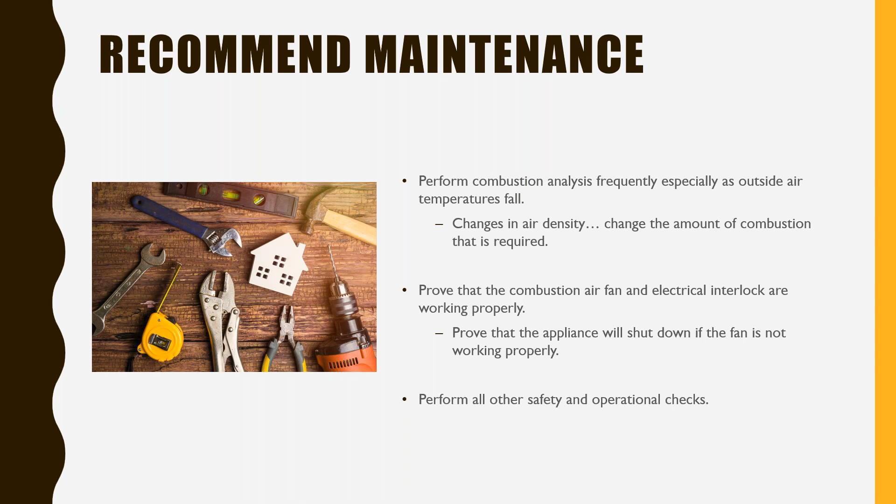So here's an example. I've got a 200,000 BTU per hour boiler and a 100,000 BTU per hour hot water heater, so my total is 300,000 BTUs per hour. When I use a mechanically supplied combustion air method, I'm going to take my 0.35 CFM and multiply that by the quotient of 300,000 divided by 1,000 BTUs per hour. That's going to give me 300.

I'm going to multiply that 0.35 times that 300. My slide is wrong, it's actually going to be 105 CFM for this space. So this particular example would be 0.35 times 300, which would be 105. So these need to be changed.

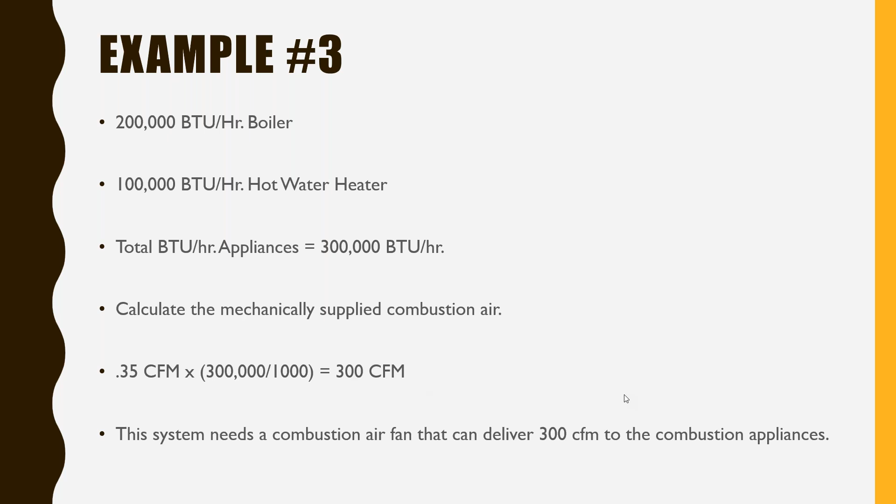That brings us to poll question four: what is an appliance's CFM rate per BTU per hour for mechanically provided combustion air? A, 0.15 CFM per 1,000 BTU per hour. B, 0.25 CFM per 1,000 BTU per hour. C, 0.35 CFM per 1,000 BTU per hour. And D, 0.45 CFM per 1,000 BTU per hour.

I'm going to close the poll here in a few seconds. And it kind of looks like everyone pretty much got it right.

So the question was, what is an appliance's CFM rate per BTU per hour for mechanically provided combustion air? 2% answered A, 0.15 CFM per 1,000 BTUs per hour. 7% answered B, 0.25 CFM per 1,000 BTU per hour. 88% chose the correct answer, option C, 0.35 CFM per 1,000 BTUs per hour. And 2% chose option D, 0.45 CFM per 1,000 BTUs per hour.

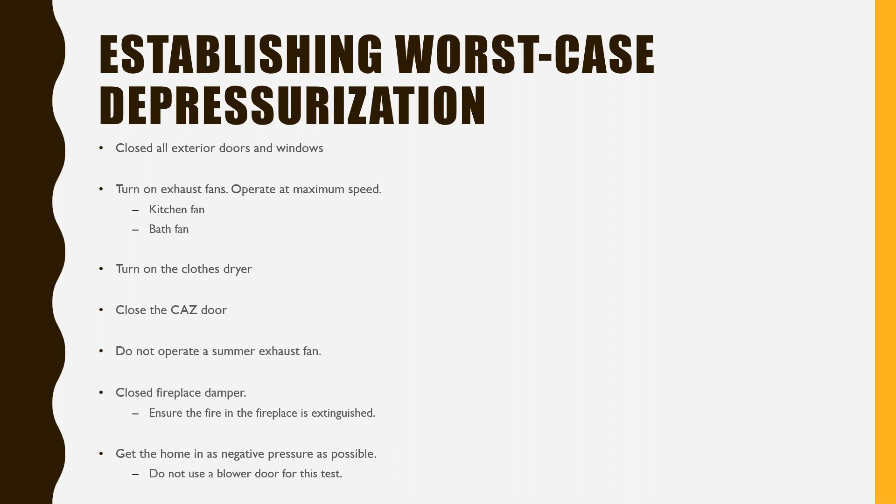When you do this test, you're trying to get the house as negative as possible, but you're not using a blower door—you're using all the appliances in the house during normal operation to make the house go as negative in pressure as possible. Once we establish worst case, that's when we start our testing.

So the first thing we do is put our first appliance in operation, and you're going to visually verify that the appliance lights off properly. Did I get any kind of flame rollout on startup? Did the flames dance off? Were they really loud? Any kind of visual clues that there may be an issue. If that appliance has a draft hood, you're going to test for spillage.

All right, testing for spillage means we're going to discuss it here in depth shortly, but basically you're looking for evidence that the exhaust gases are not going up the equipment. Another test you're going to do is test for draft, and then we're going to do some combustion testing. So you do that for the first appliance, and then turn on the subsequent appliance inside that combustion appliance zone.

Remember, all these tests are going to be done while that building or home is in worst case. First thing we're going to do is test for spillage. Spillage is a visual indication. I'm going to use a smoke pen, a fogger, maybe a mirror, and I'm looking for physical evidence that the exhaust gases are coming back.

We're going to make sure they're not coming back after the 2-minute mark. Where the 2 minutes comes from: when I have a cold appliance coming on for the first time, my chimney may be cool, and it may take up to 2 minutes to establish a draft. After 2 minutes, if I have spillage, backdrafting, or flame rollout going on, I have an issue that I need to address. So spillage is a visual indicator that you have a combustion air problem. Once again, it's going to be done in worst case.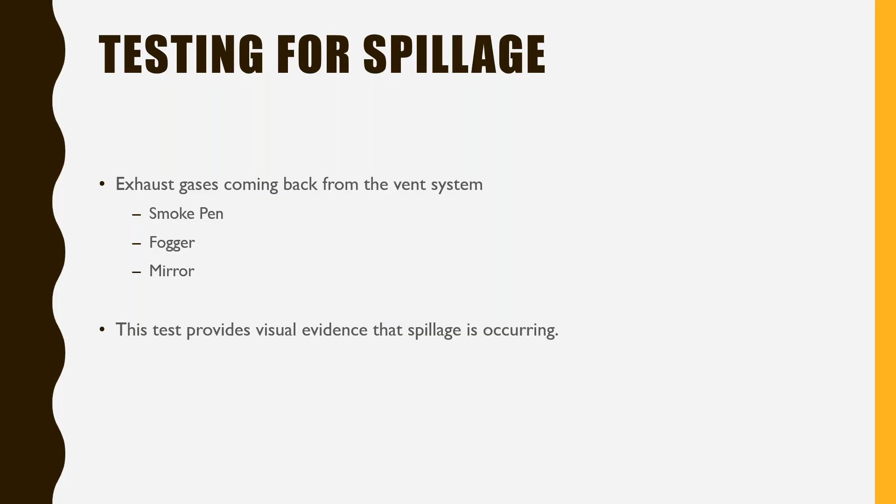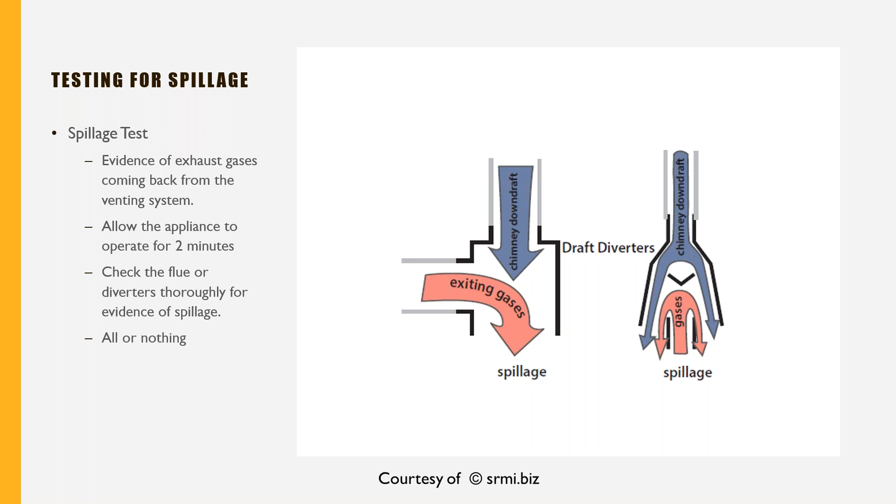Testing for spillage: you're going to take that smoke pen, fogger, or mirror, and put it near the draft diverter of the appliance. You're going to look for that visual evidence to see that the exhaust gases are coming back. Now, after 2 minutes, it is all or nothing—either those exhaust gases are going up or they're not. Any portion of it, it's a pass-fail criteria. Either it is drafting properly or it's not.

Draft is another test that you could take. When I get draft, I'm going to take a manometer, and with a static pressure probe or a reference tip, I'm going to check the exhaust piping, and I should have a slightly negative pressure for natural draft appliances. Draft can be affected by the height of the chimney, the temperature difference between indoors and outdoors, the design of the chimney, and the materials. Typically, when I have a draft, I want to fall in a range of negative 0.02 to negative 0.04 inches of water column.

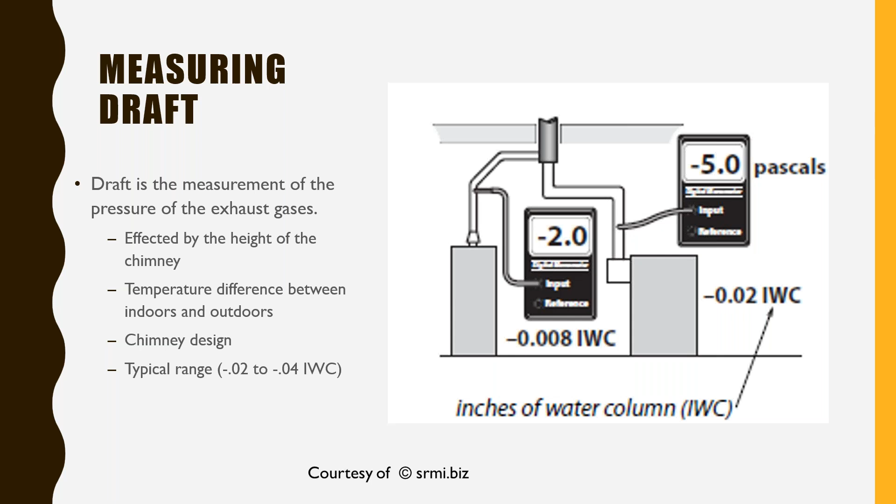Some manometers can be transferred over to pascals. Pascals is another reference point that you can use. But the key here is it needs to be slightly negative, slightly negative. Now, in worst case, if it is drafting while slightly negative—if I have my worst case conditions, as negative as that home or building can be, and I'm still able to draft—chances are you do not have a combustion air problem.

When we talk about draft, where you're putting your probe is not critical like combustion testing. I'm not referencing any of the flue sample, I'm simply checking the pressure. So I can make it in a diluted space or undiluted, doesn't matter. I want to check it after 2 minutes, and I insert my manometer. Your draft should consistently get more negative as the appliance is coming on. And remember, in a worst case scenario, if I am drafting properly, chances are you have adequate combustion air.

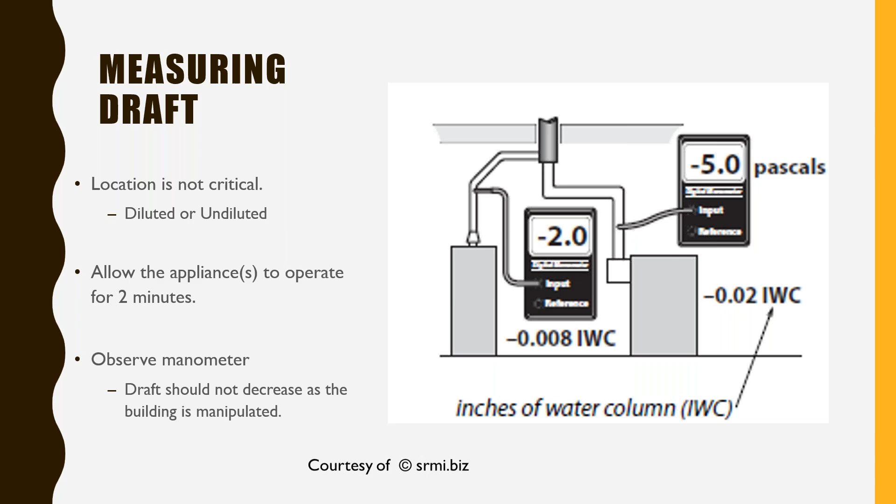Here's a draft interference test. While you're checking draft, and you suspect that you have a combustion air problem, you can start to identify what's causing your manometer not to track in a negative direction. If the pressure is not adequate, you can start by maybe turning your exhaust fans off—do I have a draft change? You can start by closing doors or opening doors—did my draft change? Do I have excessive shell leakage? In some cases it can affect my draft. Do I have duct leakage, like leaky return ducts inside my CAZ? That can cause a negative effect on my draft. And obviously, do I have inadequate combustion air?

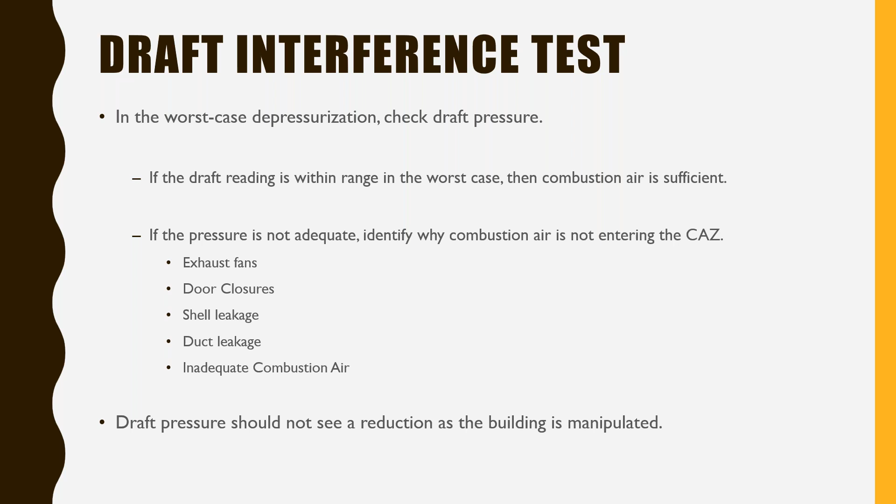So with that draft measurement, at worst case, if you see a reduction in draft, you have an issue. If you don't see a reduction in draft, in worst case, chances are combustion air is good.

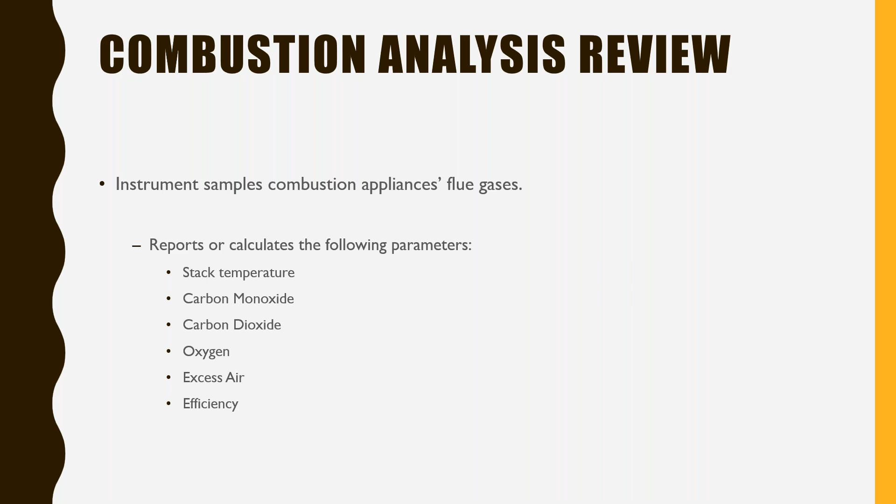And then the last test you can perform is combustion analysis. With combustion analysis, you're taking an instrument that has sensors inside and you're going to sample those flue gases. You're looking at the stack temperature. You're going to be checking carbon monoxide, carbon dioxide, oxygen, excess air, and efficiency. With a combustion analyzer, you always want to get an undiluted sample.

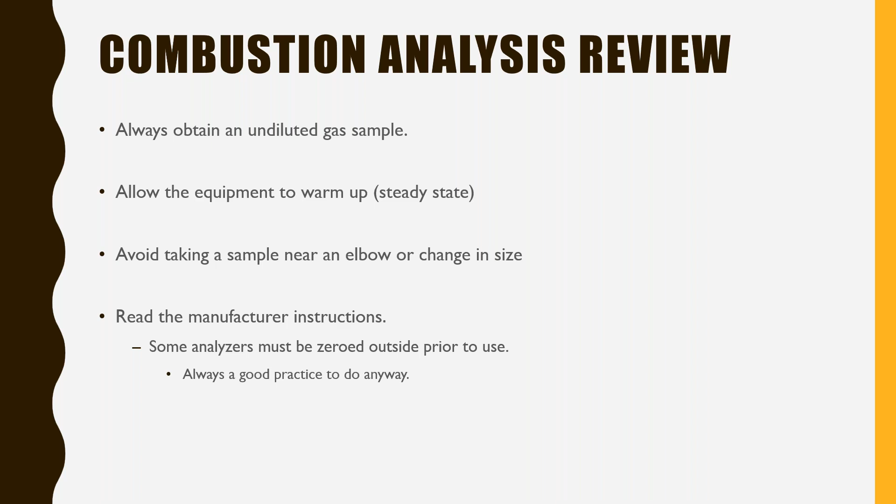So you want to have a sample taken before any air that can mix with those flue gases and dilute your sample. When you do a combustion analysis test, you always want to do it at steady state or after your equipment warms up. And just a recap, you always want to avoid changes in size. You don't want to take it near an elbow, changes in direction, stuff like that. And just remember, always get your reference, always zero your equipment outside. It's just a good habit to get into.

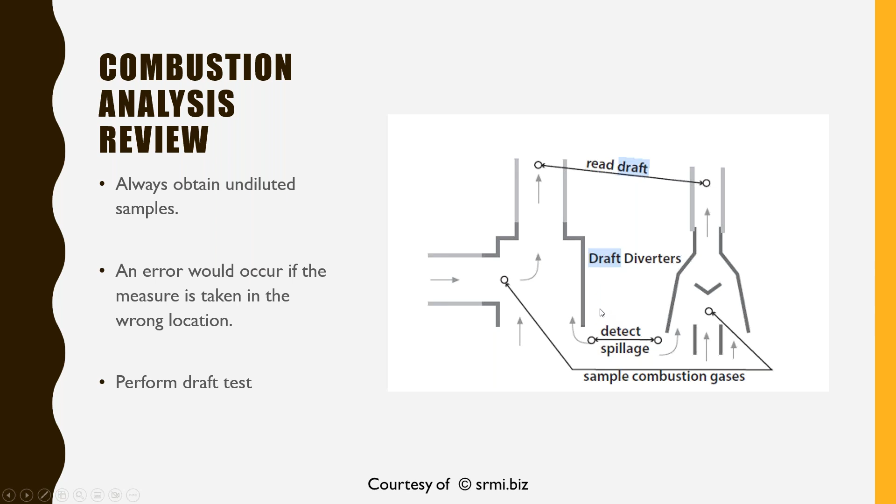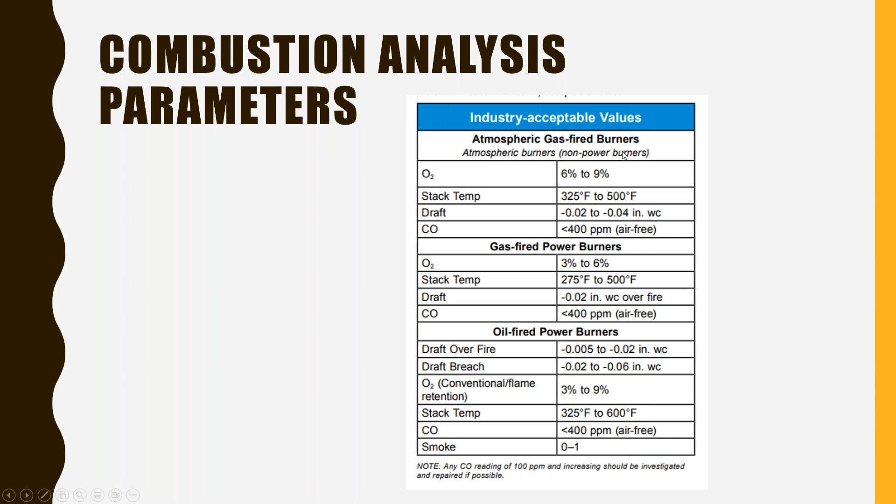Here are parameters. These are pretty industry basic, a lot of manufacturers will follow these. Now, when we talk about combustion testing, when I am in the worst case, that home is in a worse situation because of depressurization, I still should have oxygen in a range between 6 to 9 or whatever appliance I'm dealing with. If I don't have adequate oxygen in that range after I verify the fuel gas pressure, then I need to start looking to see if I have a combustion air problem.

So what you're going to do is observe the oxygen, or O2, readings on your analyzer. What you're looking for is above 5%. With natural draft appliances, some people say 6. Or with a power burner, you can be above 3%.

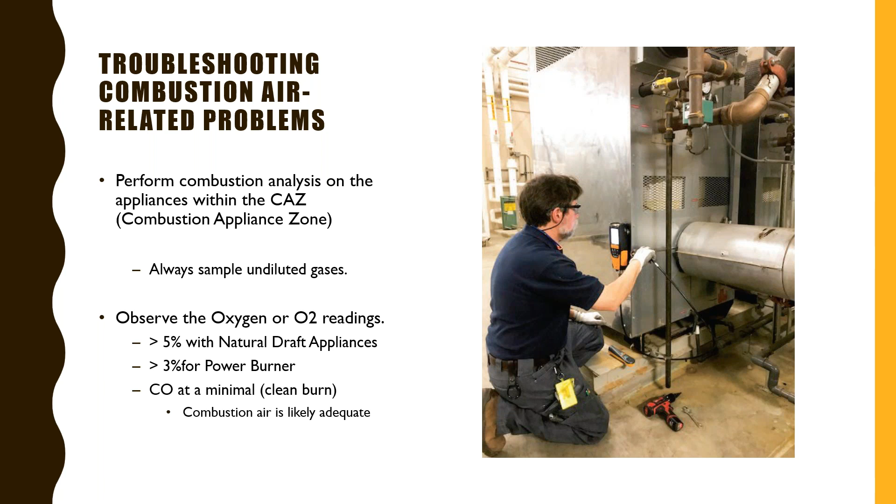And what you're looking for when you're testing that appliance with a combustion analyzer, in a worst case scenario, is: is my oxygen steady? Is it within my ranges? If so, then chances are I don't have a combustion air issue. If it is below my minimum or my range, then it's likely I could have one, after I've verified the fuel pressure.

One way to tell if you have a combustion air problem: if I have a poor or low O2 reading with my combustion appliance, and if I open the door to that CAZ, or combustion appliance zone, or if I open a window and my oxygen starts to improve, then guess what? You've got a combustion air issue.

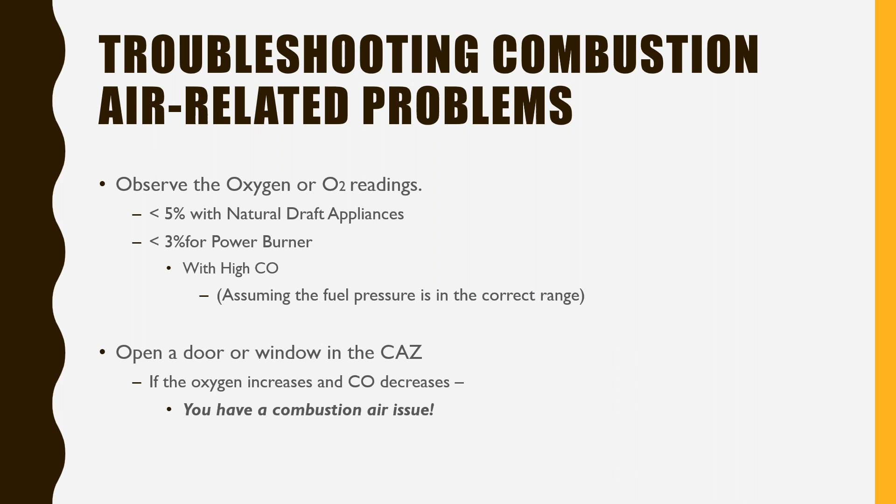All right, here's some repairs. If you can, with your customers, always opt for sealed combustion appliances, your high efficiency furnaces. And remember to go with 2 pipes. If you single pipe it, you're going to have to account for combustion air.

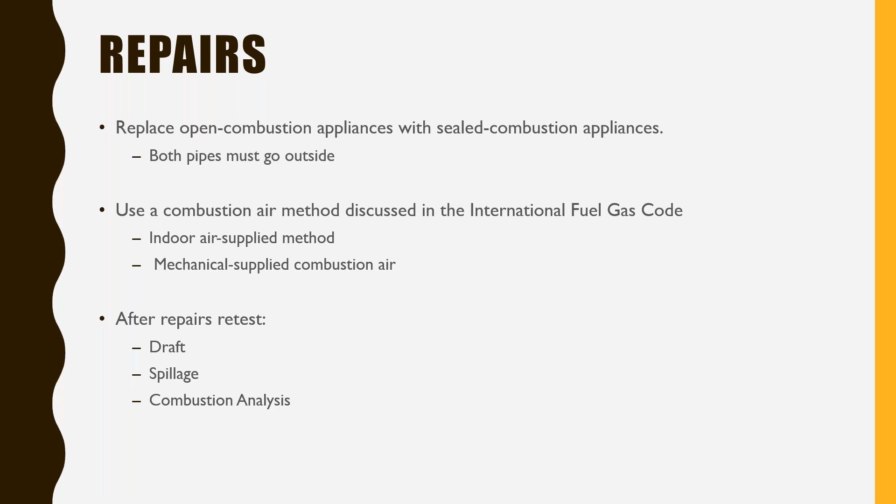We also talked about the 2 different methods that are found in the International Fuel Gas Code. Remember, there are many others—these are just two that are often used the most. And then after the repairs are made for your appliance, let's say you do add combustion air, you need to pre and post test. So I need to pre-test to identify my problem. Once I make my repairs or countermeasures, I need to perform some post test.

And with that, we will open it up to some questions. All right, so the first question: is there any control to maintain hot or cold combustion air supply, as well as a pressure controller if the combustion air is too much?

Generally, when I've seen combustion air tempered in industrial settings, I've seen a dedicated air handler that had either electric resistance heat or a hot water coil inside to temper the combustion air before it goes into the appliance.

How do you safeguard against flame rollout? You safeguard against it by supplying enough combustion air. If you have enough combustion air, and the appliance is healthy—meaning no cracked heat exchanger, no blocked chimneys or flues, and the chimney is sized properly—flame rollout is really unlikely.

What if you were just to take outside air directly into the furnace and hot water heater? That is a method, though we didn't cover it. The reason it's not as common is that if you have large mechanical appliances—a big boiler, or a combination big boiler and water heater like in an apartment building—you'd need a pretty large hole, which is impractical. So in that case, most people go from an indoor supplied air method to mechanical combustion air, but that is a provision allowed in the International Fuel Gas Code.